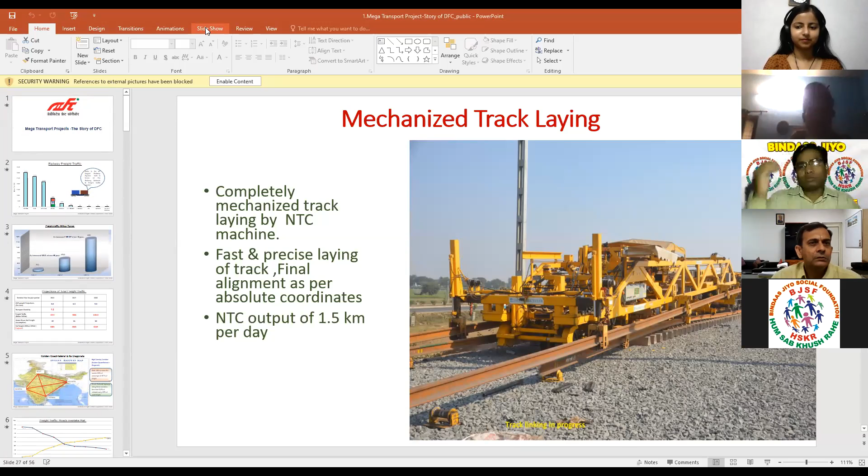Normally, I do not know how many people are aware about the Dedicated Freight Corridor, because it's a public sector undertaking under the Ministry of Railways, 100% owned by the Ministry of Railways.

The exclusive job of DFCC, Dedicated Freight Corridor Corporation of India Limited.

In the present scenario, the railway system has become very congested, and there is no possibility of increasing passenger trains on the existing system. There is always a public demand to increase as many trains as possible, but there is a restriction on the existing infrastructure.

So the Ministry of Railways in 2006 thought of creating something exclusively for freight transport, a separate network of railway system which will only enable the freight corridors.

And definitely it's a state of the art, most modern corridor made for goods. There are many advantages, which I will be covering in my presentation later on.

So first I will just give a background of the freight scenario in India. This is about railway freight traffic.

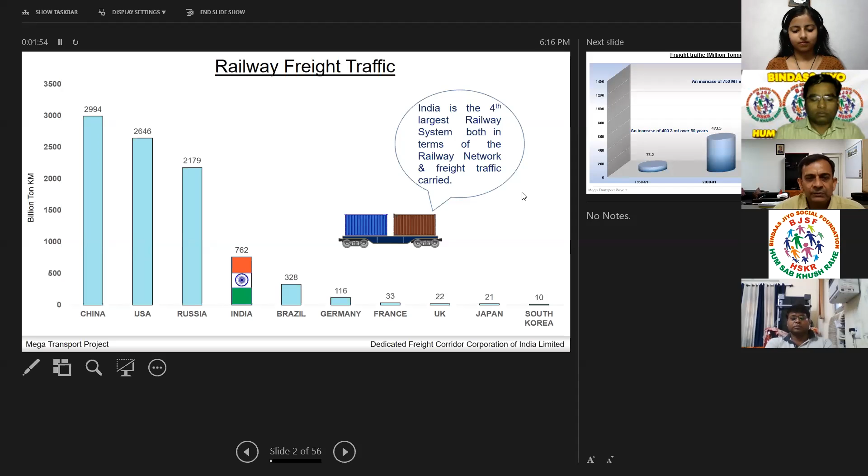Billion ton kilometer means weight into kilometers. So it comes around fourth largest after China, USA, and Russia. India is one of the very important players in freight transport.

This is about the freight traffic as of 2018-19. We carried in Indian Railways around 1225 million tons of traffic.

And you see the increase in traffic even in the last 18 years because of GDP growth, population growth, and industrialization—the freight traffic is increasing substantially in the Indian scenario.

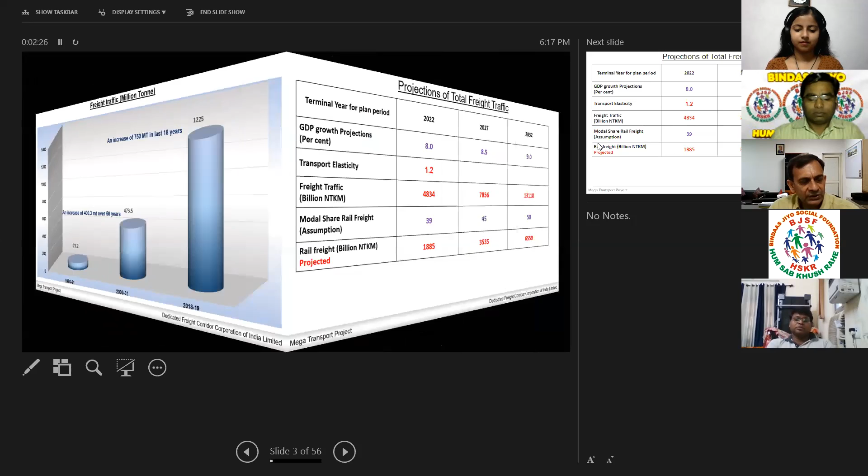So projection of freight: in 2022, we are expecting 1,885 billion NTKM of traffic.

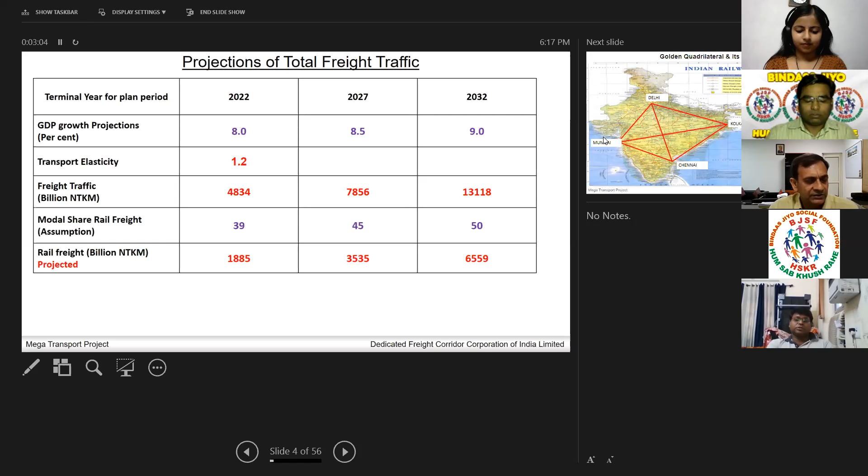So about twice the traffic will be there in 2027, and it will be further four times by 2032. This is the scenario we are projecting on the Indian system, that so much freight traffic will be generated.

And out of this freight traffic, if we consider railways versus road—because we have 4 metros and most of the traffic, whether road or rail, is transported from metro to metro.

We call this the golden quadrilateral, whether road or railways, mostly these sectors carry the traffic. In railways, it is around 16% of the total routes, but they are carrying around 52% of the total traffic.

So you see the congestion on this route, how much traffic is in the golden quadrilateral. Similarly, the road carries around 40%, whereas it is only 0.5% of the road network.

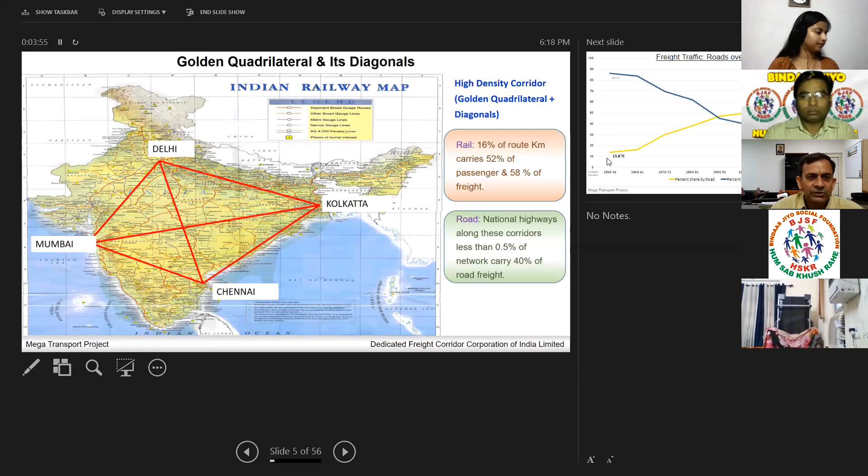Now we come to railways versus road. In 1950-51, you see the share of rail was around 90%, meaning roads were not developed, and railways were carrying around 90% of the traffic.

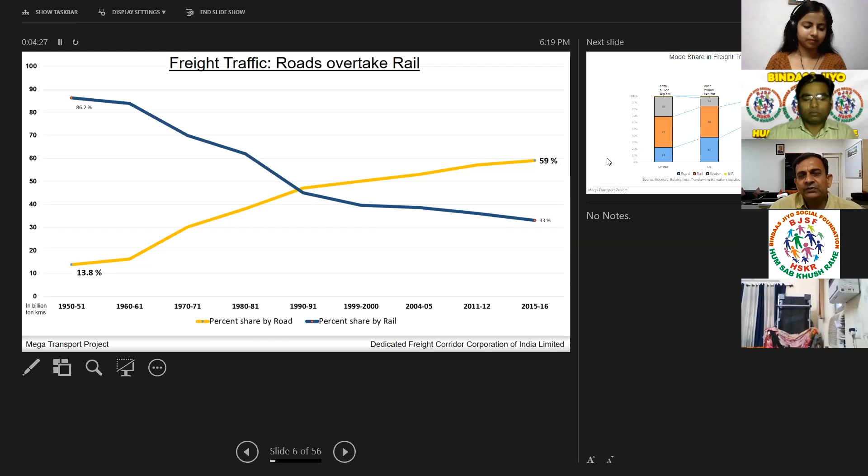In 1991, it was in balance, and thereafter rail share is decreasing day by day because of various considerations. One of the considerations is congestion in infrastructure. So by creating the dedicated freight corridor, we are expecting this trend to be reversed.

Globally, India is carrying around 36%, whereas developed countries, maybe the US, carry around 48%. So roughly around 50% of the total rail traffic should be carried by railways.

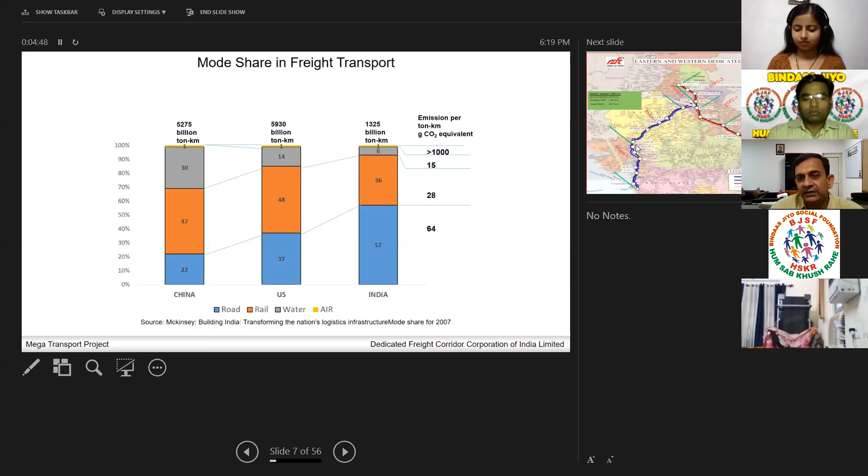Now comes the need for developing the railway freight corridor. So I said that in 2006, the Government of India decided to make dedicated routes for freight corridors. The main constraint was funding.

So for funding, it was tried whether we could do it through local resources, maybe internal resources of the Government of India.

So it was not possible. Finally, after a lot of delays and discussion, 2 corridors were sanctioned.

One is known as the Eastern Corridor. It is from Ludhiana to Dankuni, which is very near Kolkata. This is around 1800 kilometers, because most of our coal sector and iron and steel industry traffic is transported through this route.

Another corridor joins at Dadri near Delhi, running from Delhi to JNPT. This is basically for finished products and export-import oriented routes. We call these the Western Dedicated Freight Corridor and the Eastern Dedicated Freight Corridor.

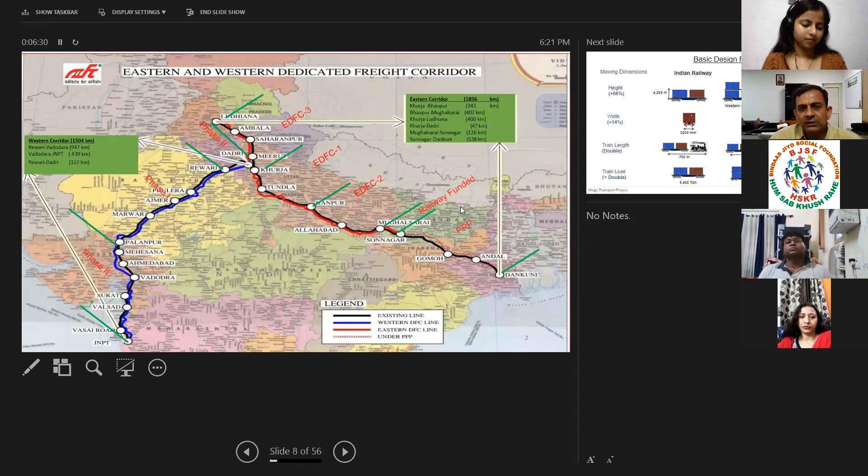The Western Dedicated Freight Corridor is funded by the Japan International Cooperation Agency, JICA, and the Eastern Corridor is funded by the World Bank. Both corridors together cost around 81,000 crores. About 3 years back; now the cost has increased to approximately 1 lakh crores.

While deciding the corridors, since this is a most modern corridor, we thought let us have a breakthrough. Even in the existing Indian railway system, the height we carry is 4.26. Most of the Western corridor commodity is carried by containers, so we thought of having a double stack container train. I am happy to inform that we have started running double decker container trains in the Western corridor.

In the Eastern corridor, because the predominant traffic is coal and steel, the height was kept at 5.1, much more than 4.26. Width also we have increased from 3.2. This is just for better capacity utilization.

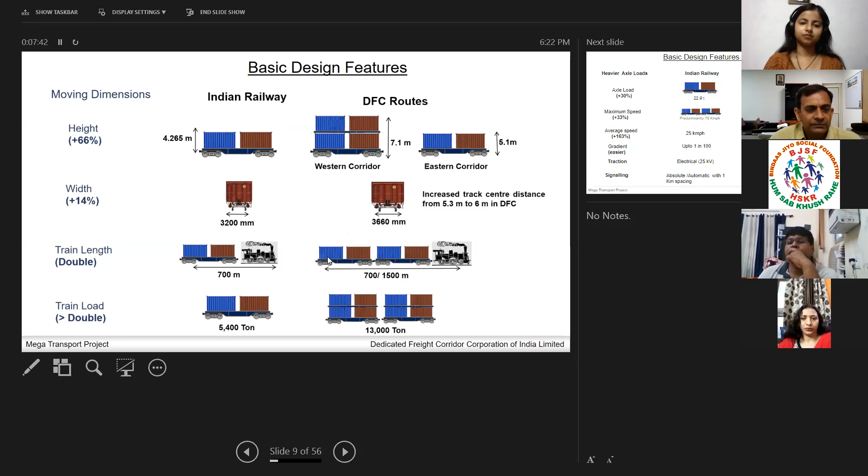Train length in the Indian railway system for a goods train is currently around 700 meters. But in the dedicated freight corridor we have designed, the train length will be 1.5 kilometers, almost double the existing system. Similarly, the train load will also increase.

In the present railway system, there is mixed traffic of passenger and goods, so the speed of goods traffic is very low, around 25 kilometers per hour, whereas the maximum speed of a goods train is around 75 kmph. In the dedicated freight corridor, we will run goods trains at 100 kilometers per hour, and the average speed we are getting is 65 to 70 kilometers per hour.

Axle load means the load which a train and the track can carry. We have increased this from 22 to 25 — the most modern figure in the world. The maximum load carried in heavy haul systems, or the maximum loaded section, is around 30 or so. So we have designed our track structure for 32.5 metric tons, which is the most advanced in the world.

For track, we have limited it to 25 tons. So in common man's language, we can load the track to a higher load, carry higher speed, and maintain a higher average speed. Electric traction also we have almost doubled accordingly.

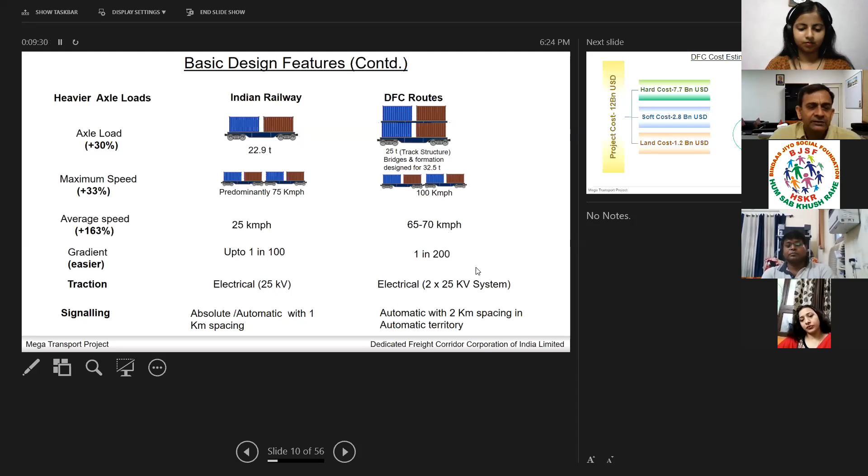The existing system is on 25 kilovolts; we are now increasing to twice that, so the carrying capacity of the same electric system will be better. Signaling also we have modified to automatic, so that at every 2 kilometer interval we have one train. Imagine the capacity of the new system.

On cost, the World Bank has given 1.86 billion US dollars around 2013, and JICA has given 569 billion yen. World Bank is also appreciating this project — they have said this is the biggest loan ever financed by the World Bank in the world. So the World Bank is also very much eager to have this project completed.

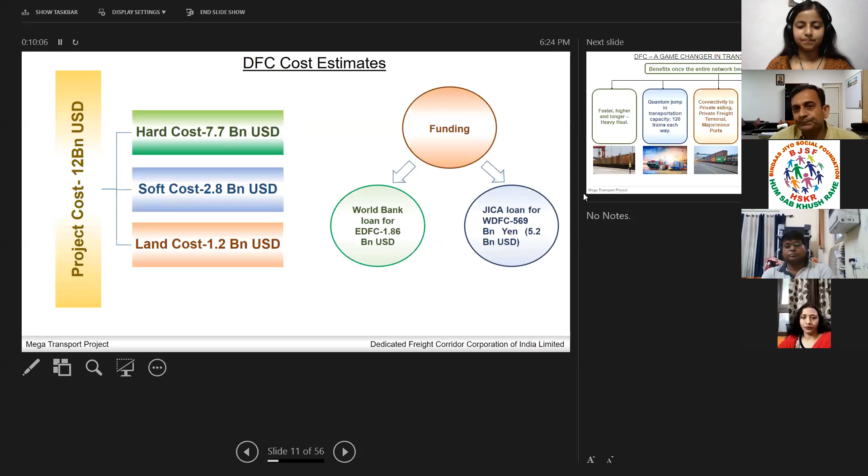Just a few benefits on the Indian economy and transport systems: first, it will enable heavy haul train operation in line with the world, and our transportation capacity will jump.

Connectivity to port terminals will be improved. And what is most important with the dedicated freight corridor is that we run the goods trains on a timetable. As of now, nobody knows when the goods train will reach its destination and when the product will be delivered at the delivery point.

To overcome that, the dedicated freight corridor is promising that from Delhi to Kolkata it will be a 14-hour delivery, equivalent to the Rajdhani train as of now. And from Delhi to Mumbai it will be around 12 hours. We are putting in place a system where we will be running trains on a timetable.

So even perishable items, even food grade items, will be carried by goods trains instead of trucks.

The technology is the most modern technology available worldwide, which we are following. And the safety provisions are state of the art, the most advanced safety provisions, so that there are no accidents and collisions.

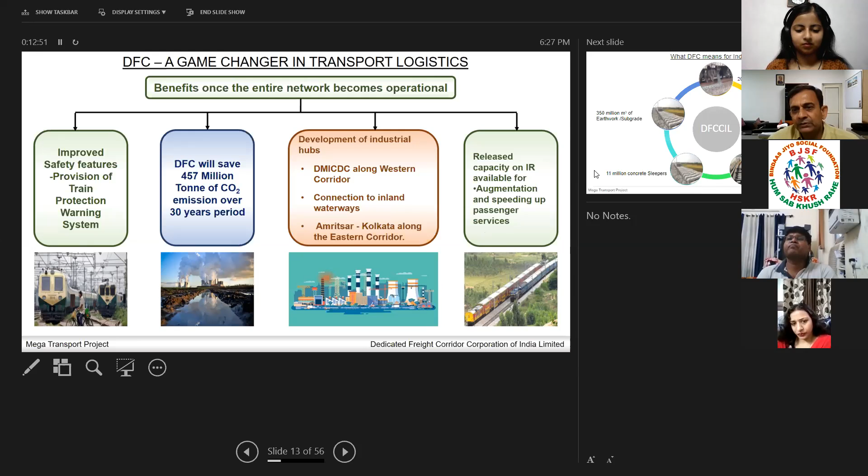And very soon there will be a time when, like airlines, you will eliminate waiting lists. There will not be any waiting list after commissioning of the dedicated freight corridor in the passenger systems. That is one of the major milestones DFCC will be serving.

This is again about what DFCC means to the industry.

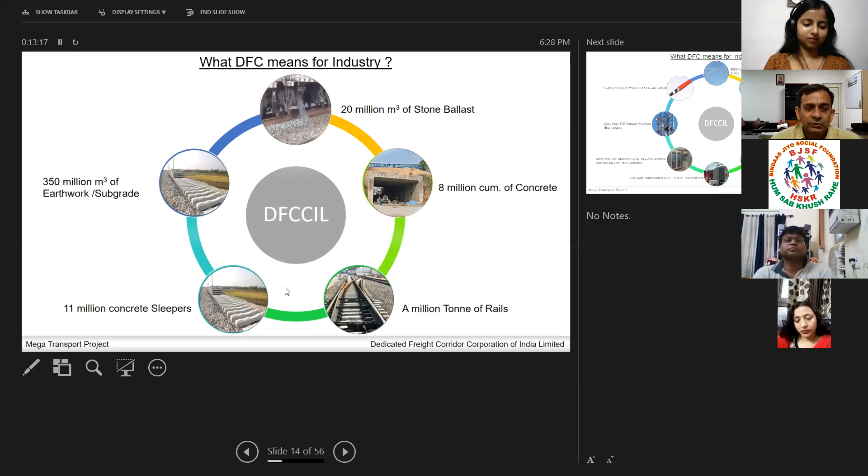This is a mega project in terms of volume - 20 million cubic meters of stone ballast, so much concrete, so many rails. This DFCC has given a boost to the Indian economy, and employment has been generated tremendously.

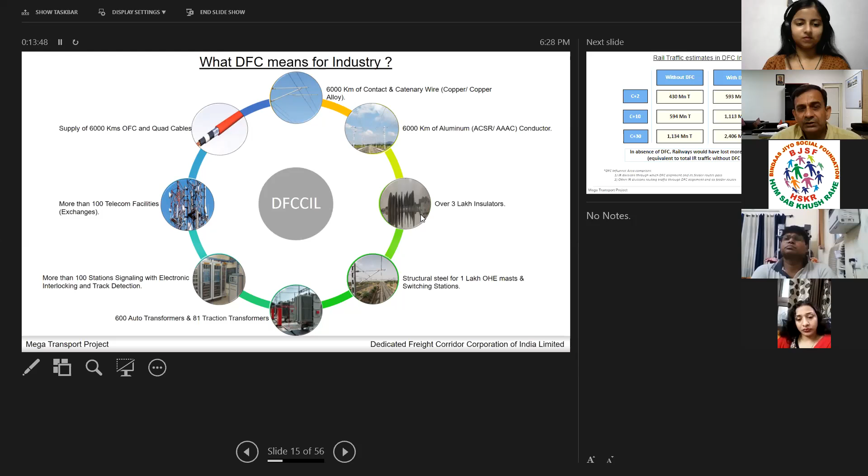I won't mention everything, because you can see so much telecom involved as well. It has contributed, I would say, almost 5% to the country's GDP because of DFCC. Of course, so much steel, insulators, aluminium, and many other things are being consumed in making the dedicated freight corridors.

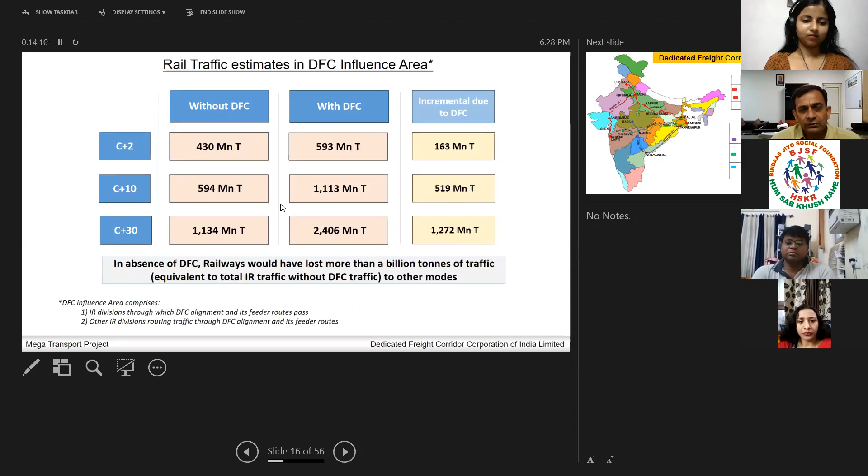Now coming to the further corridors - two corridors, as I've said, Western and Eastern, are under construction. Around 2022, both these corridors will be completed.

We have also planned, in India, an East Coast Corridor from Kharagpur to Vijayawada. This is upcoming. There's also an East-West Corridor, from somewhere near Maharashtra to this place, and a North-South Corridor from Vijayawada to Itarsi. These will carry the majority of Indian Railways' traffic.

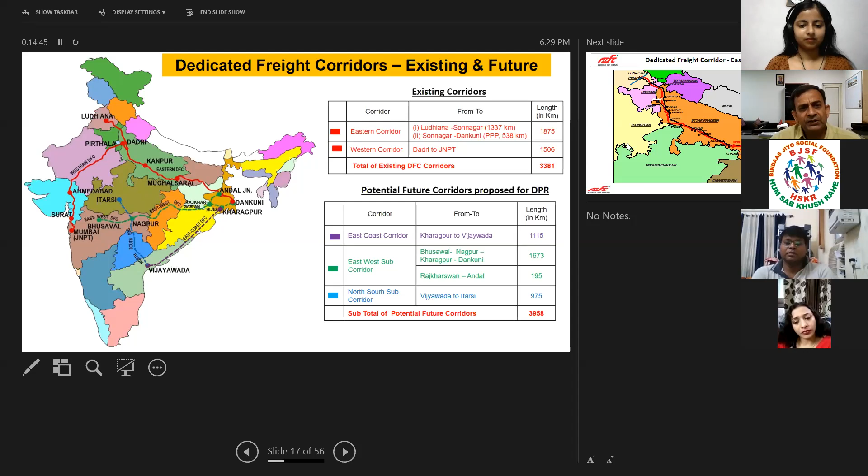Now coming to my project, this is the Eastern Dedicated Freight Corridor, from Ludhiana to Dankuni. Out of this project, around 350 kilometers is near one place - Kanpur. We call it Bhaupur because it is around 13 to 14 kilometers away from Kanpur.

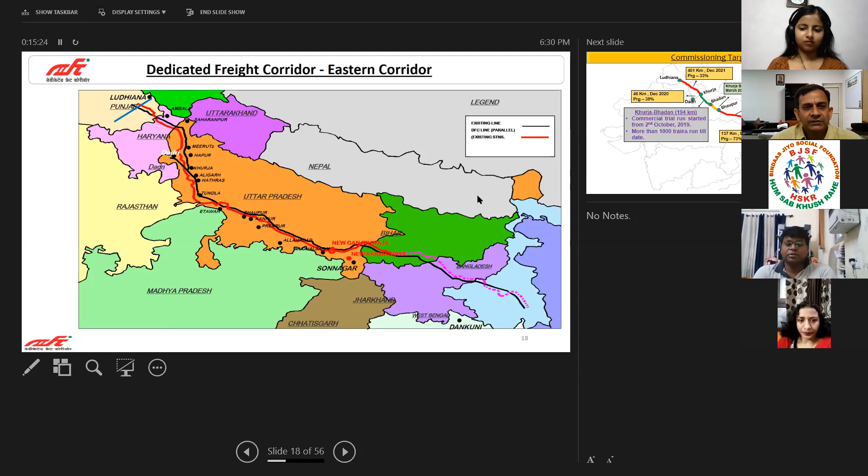This is Kanpur, and here we have a Khurja station. So Khurja to Kanpur is my project area. Let me elaborate - this is Khurja and Bhaupur, around 350 kilometers. I am in charge of this project.

Out of this, 194 kilometers has been completed and trains have been running over this since 2nd of October. This portion, Bhadan to Bhaupur, we expect to run the first train by 31st of July, and normally by 30th of September we will be starting regular trains on this.

Another portion is also under construction. All this red portion shown here is under construction.

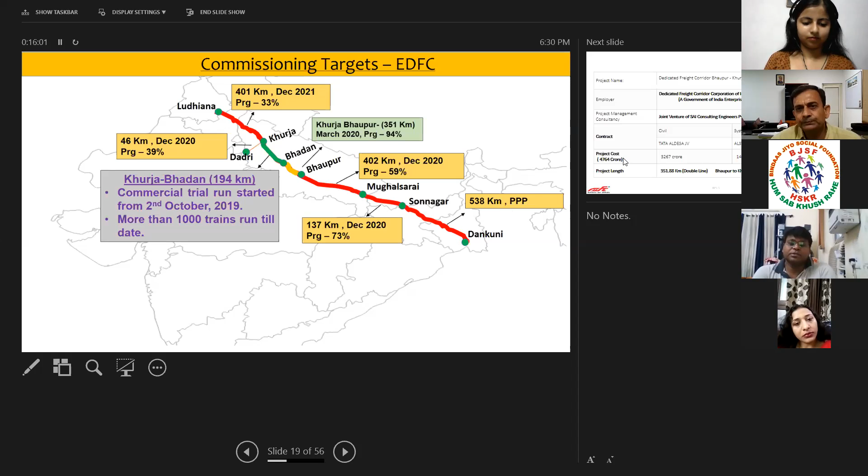Coming to the executors in the project, we call it, because this is being governed by the international contract rules, that is called FIDIC. There is a Swiss agency under which we are dealing with our contracts. So we are employer or client, we can say.

The contracts, there are two contracts. One is civil contract, another is system. Civil contractor is making all civil engineering related works up to track. And system contractor is constructing all electrical, signaling and operational part of it.

We have only two contracts. One is around 3,200 crores, given to a joint venture of Tata and Aldesa. Tata is the normal Tata Projects of India, and Aldesa is a Spanish company. The other is Alstom India, which is a consortium of various Alstom units, with main headquarters in France. Total length is 351 kilometers.

In this system, to monitor a project of this size, we have appointed an engineer. Normally in railways, or in normal contractor systems, the employer himself acts as engineer. But in the international contracting system, both parties appoint an engineer who is a neutral agency, giving decisions on various technical aspects and treating both the contractor and the employer at par.

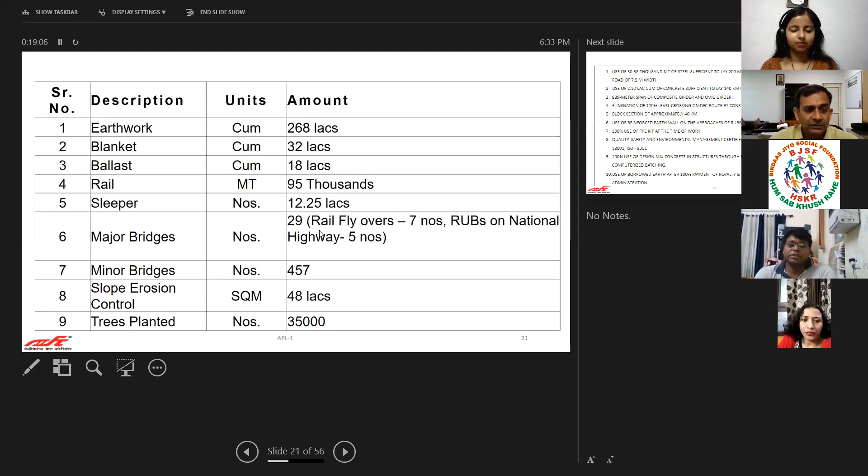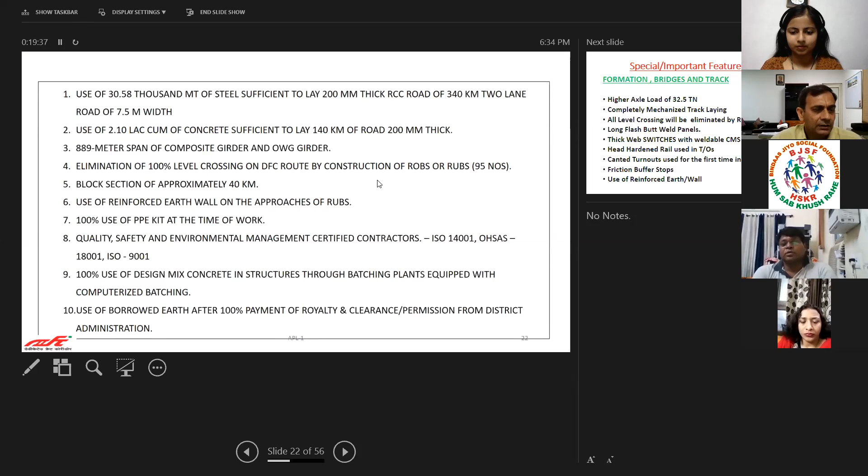Again, a magnitude, though you may not be interested, what is important is that we are eliminating all level crossings on the road. Around 95 level crossings between Kanpur to Khurja will be eliminated in the process. So everybody either can go by underpass or by road over bridges. This is an added advantage by constructing the bridges.

Now again, all level crossings will be eliminated. These are long flash-butt welded panels. In traditional railway systems, we use 13-meter long rails and weld them. But because of the dedicated freight corridor, we have asked the rail manufacturer to produce 260-meter long rails. 260-meter long rails means it will not have any joints, so rail fractures or rail failures will be eliminated, and it will be the safest track.

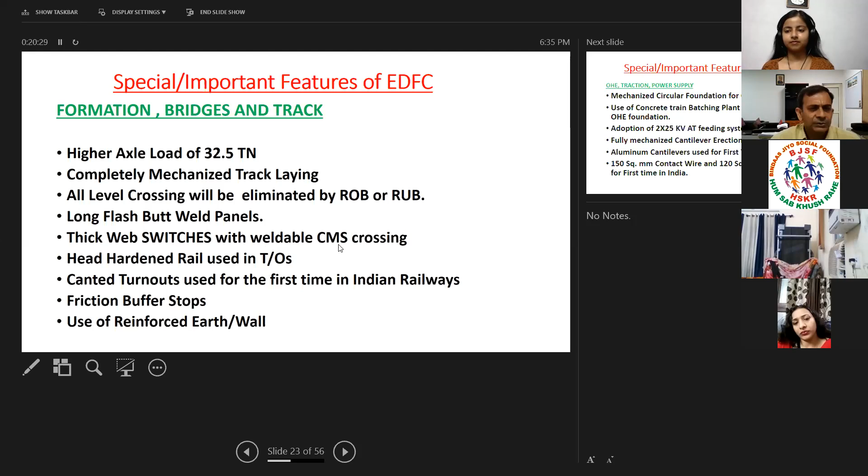Again, these are some technologies we are doing using head-hardened rail. We are using this, and if somebody is interested, I can share the details. So I'll not go into this.

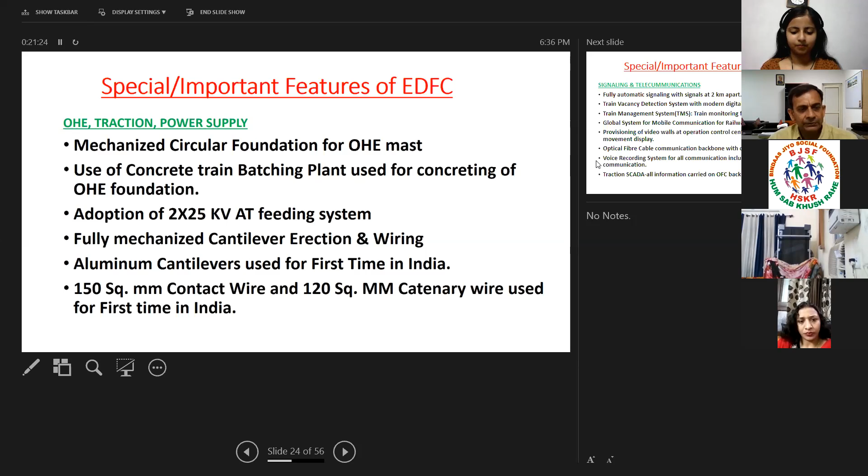I'll not go through this in detail. I'll just say this is one of the things, and I will show a film of it showing how this machine is working.

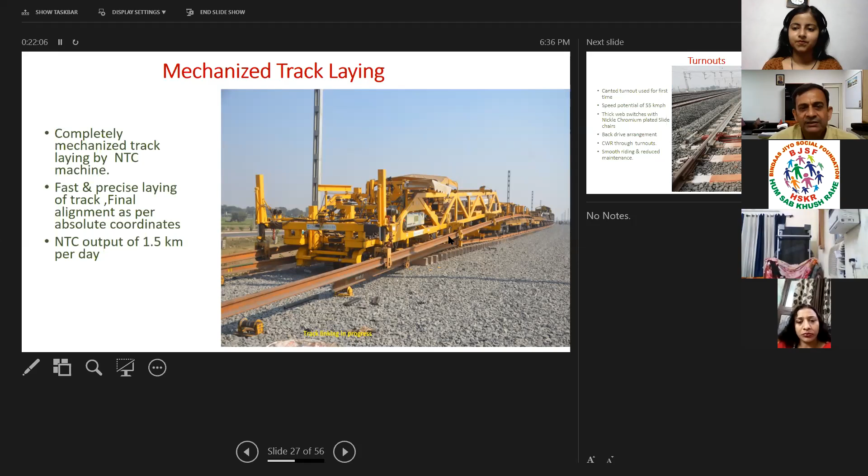This is a mechanized track laying train. It lays 1.5 kilometers of track in a day, which is normally done by around 300 to 400 persons in a day. That was the speed of execution, because constructing 350 kilometers in 3 years is by any standard a very mammoth task. If we follow the traditional system, that would take around 10 years to complete 350 kilometers. So definitely we need the most modern technology.

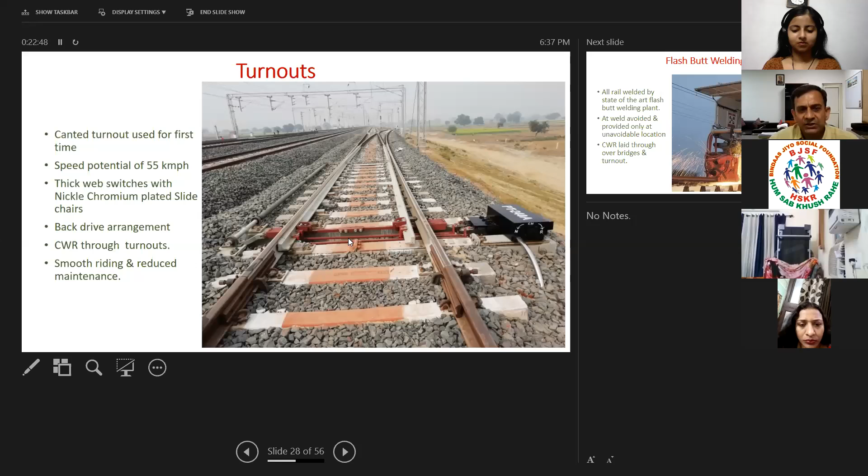This is a turnout, which you might have seen on the normal railway system, by which a train changes track. This is the most modern turnout. Normally, whenever a train is approaching a station, its speed reduces because of changing the track, to around 15 or 30 kilometers per hour, so we lose a lot of time. This type of switch, or turnout, is designed for 55 kilometers per hour, so the train can change track from one track to another at that speed.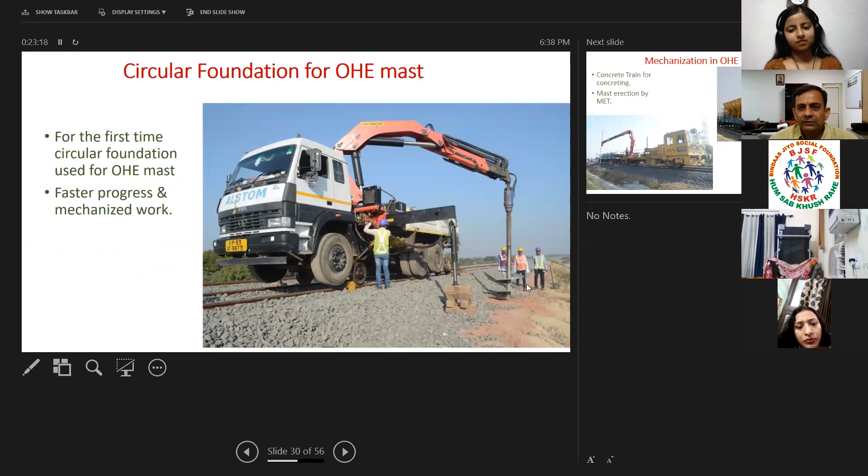We have converted one track, and by means of this instrument, which we call an auger, a circular hole is dug in the railway formation. This hole is utilized for erecting the railway pole by a machine.

This is what I was talking about, a concrete train. Basically, it is a concrete mixer plant housed over the train.

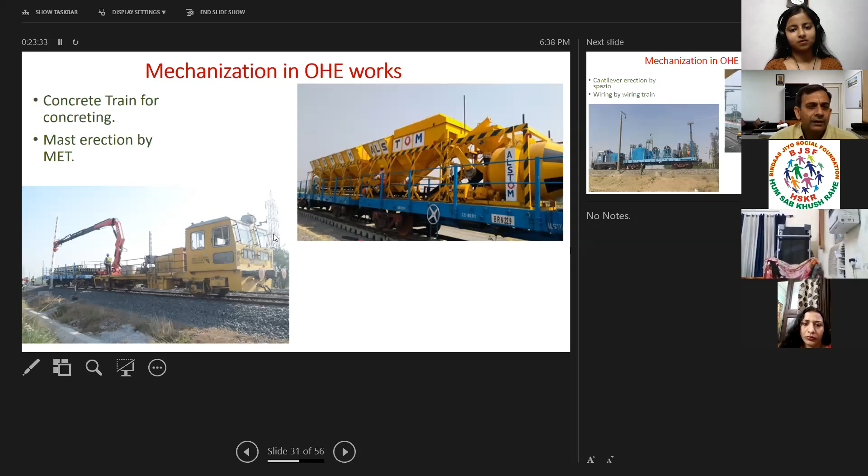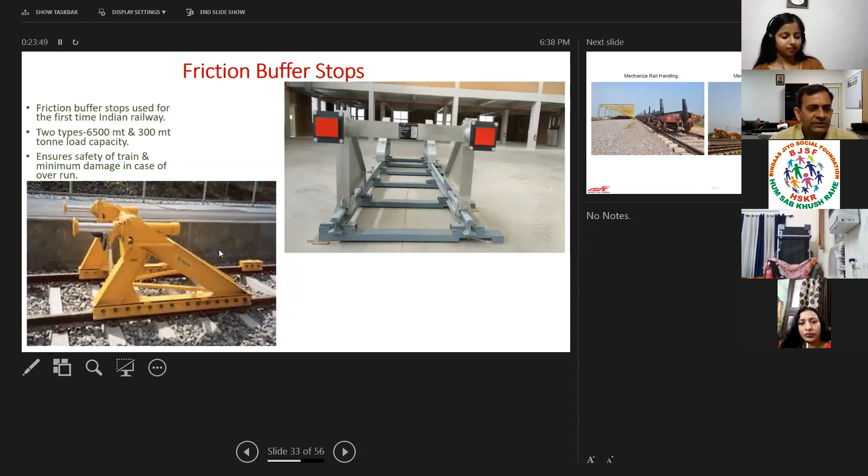This is a wiring train which we have utilized to lay the wiring over the Indian railway system. This is a friction buffer stop. I won't go into detail, but it's again a technology by which a train, if it overshoots, can be stopped using this.

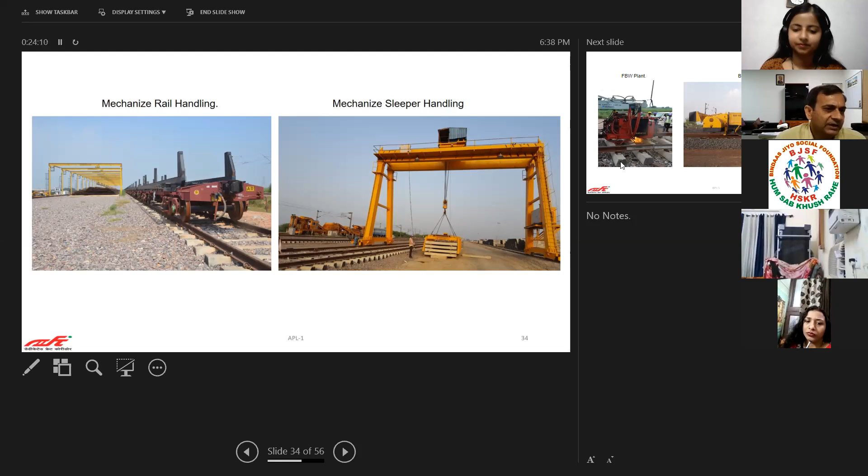This is mechanical handling of sleepers and mechanical handling of rails, which we have followed. Because when handling a 260-meter long rail, we definitely need a mechanized arrangement, otherwise we cannot lift a 260-meter long rail by manual means.

A snapshot of welding, some machine we are utilizing. This is the track completed. This is clear. I'll now move on.

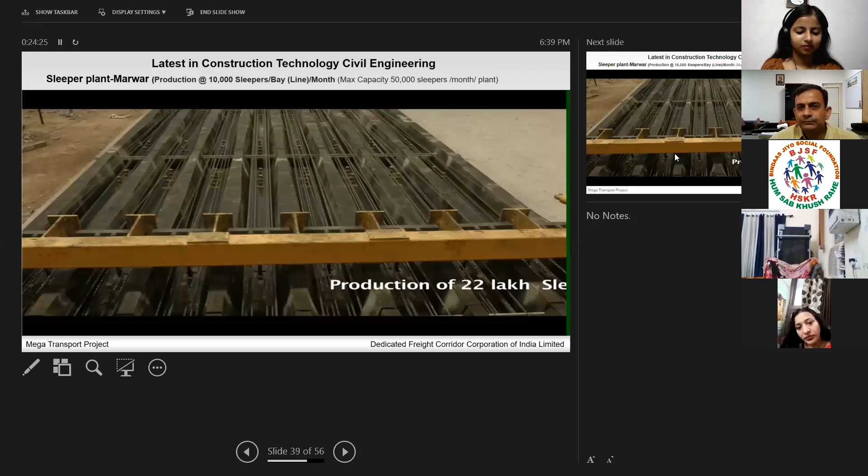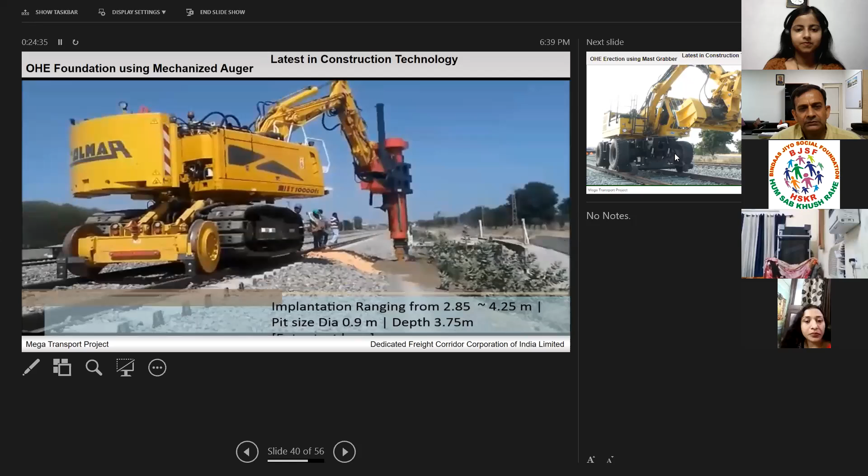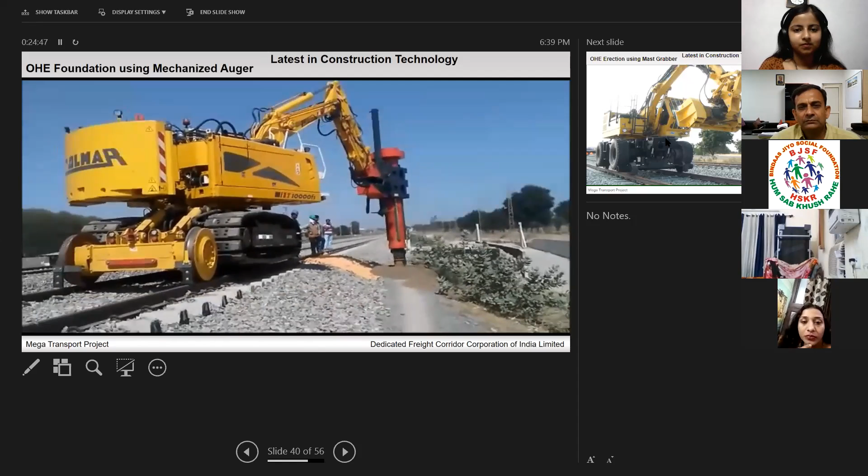So you see, this is how we are digging the foundation for the overhead electric wire. This is how we are handling the electric mast, which is utilized for erection.

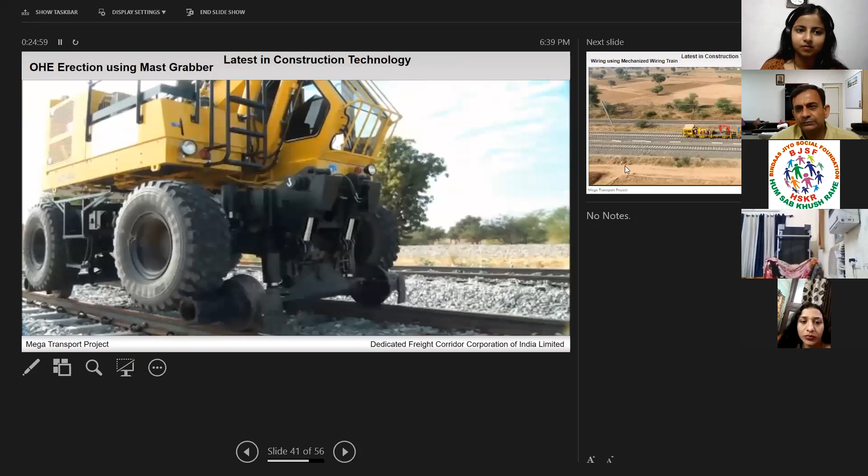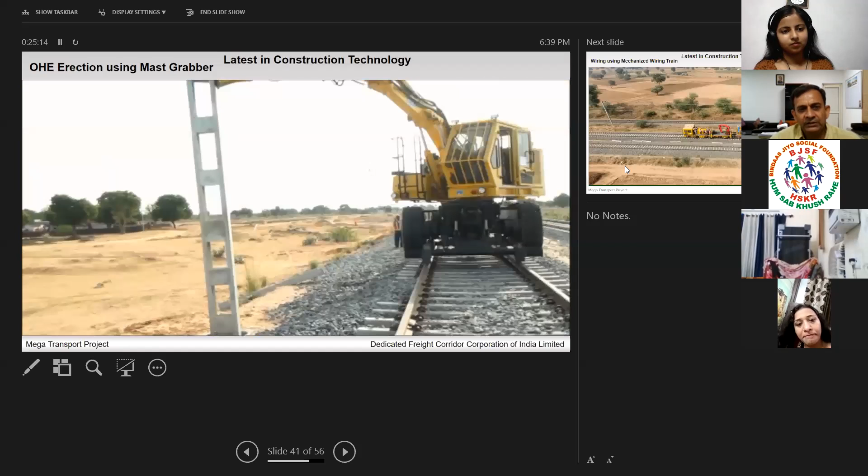That earlier machine did the whole concreting for the train, and this is a mast grabber which is utilized for this. This is the machine utilized for wiring of the electric system.

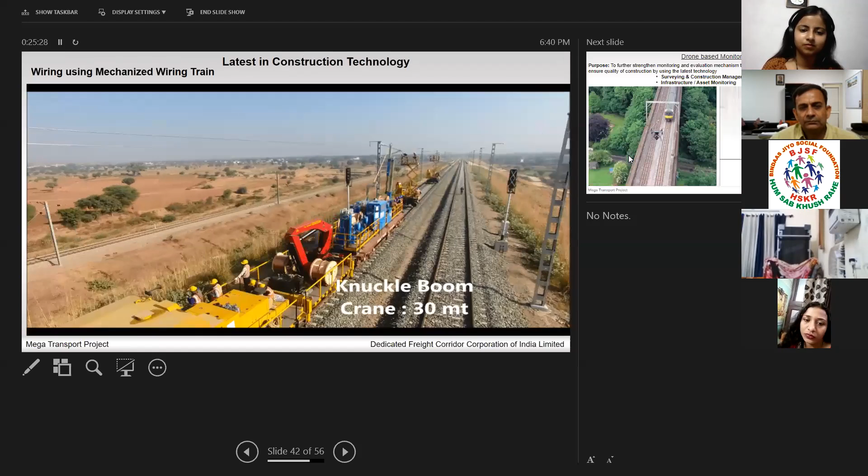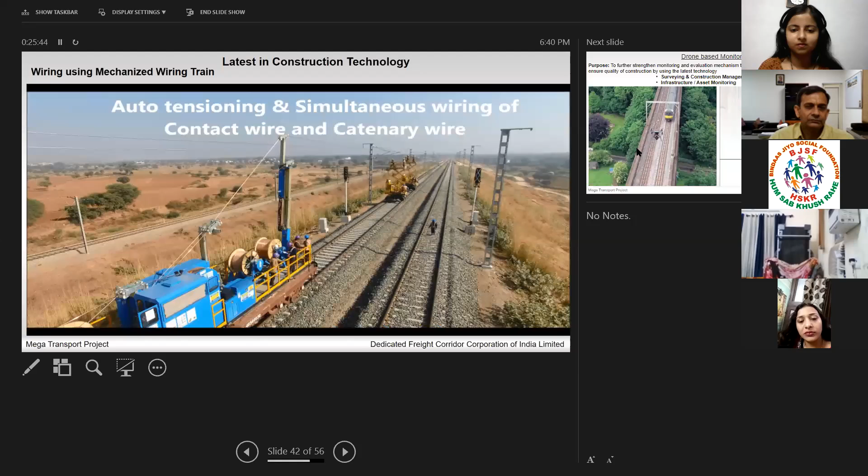By this, we can lay around 4 kilometers of wire in a day. You see, there are two spools over which the electric wires are housed, and the machine moves in one direction. This is done automatically.

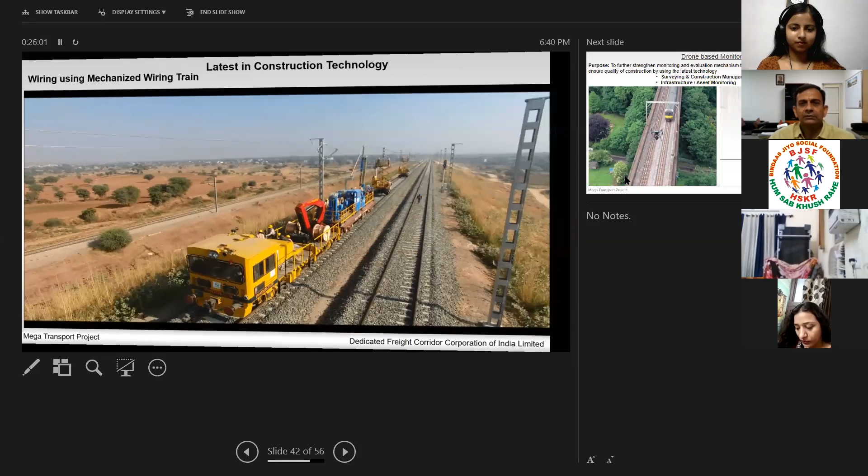This is the inside of the theater where we control the movement of trains. It is the largest, second largest in the world.

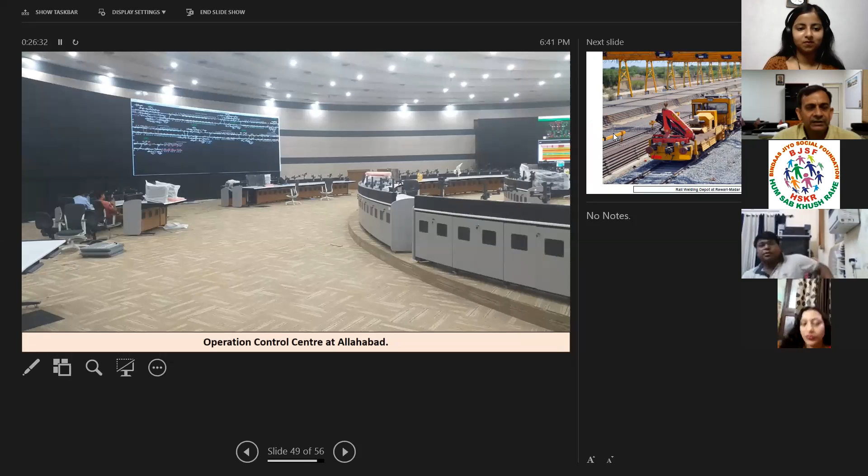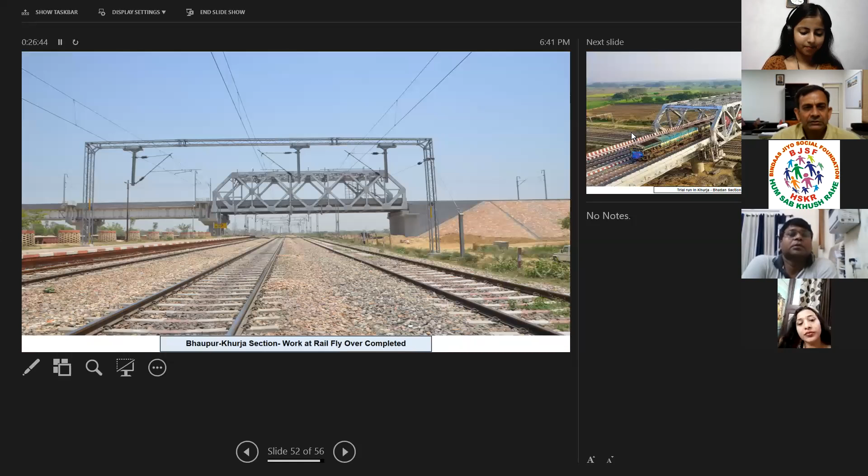So now, if you are interested, I will come to questions. If somebody is interested to ask anything, otherwise I will show some more videos of the construction.

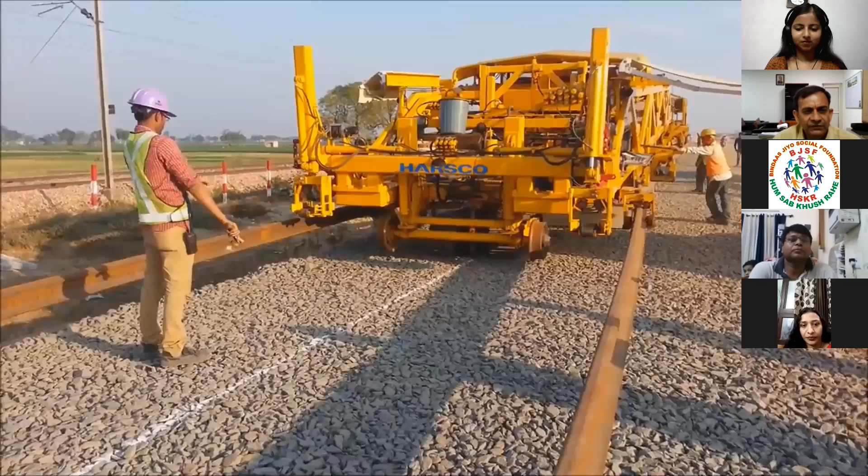This is the machine which I have shown in a photograph. It is utilized to lay the track over prepared formation. In this machine, we are practically using around 20 to 25 personnel, and they are laying the track to precision at the rate of 1.5 kilometers a day.